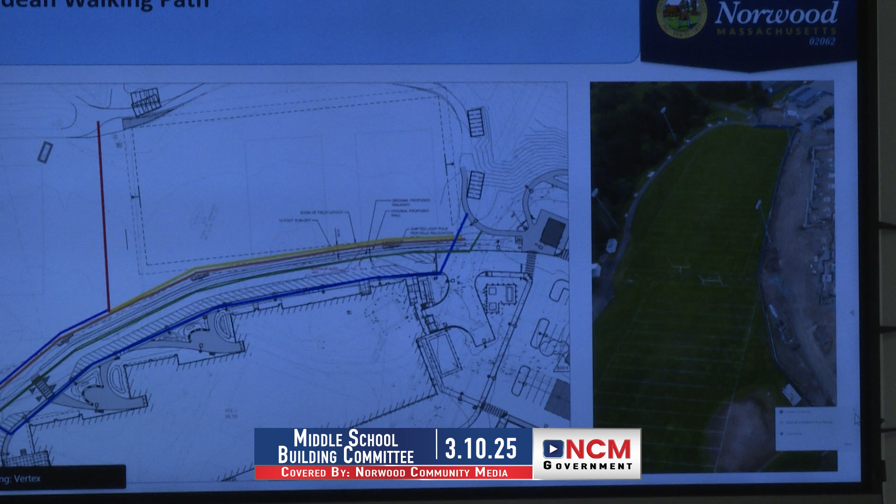So then we took a step back and looked at a couple other options where we would cut through the two fields, which would be that red line, and then a combination of the purple line heading behind the softball field, and then again the yellow line heading between the football fields. Both of those resulted in some conflicts with the softball field. You can't get behind the bleachers, you can see in the bottom right-hand corner there, and the toe of the slope, as well as the backstop. That's an even tighter pinch point there. And then the yellow line resulted in the issues with the football field.

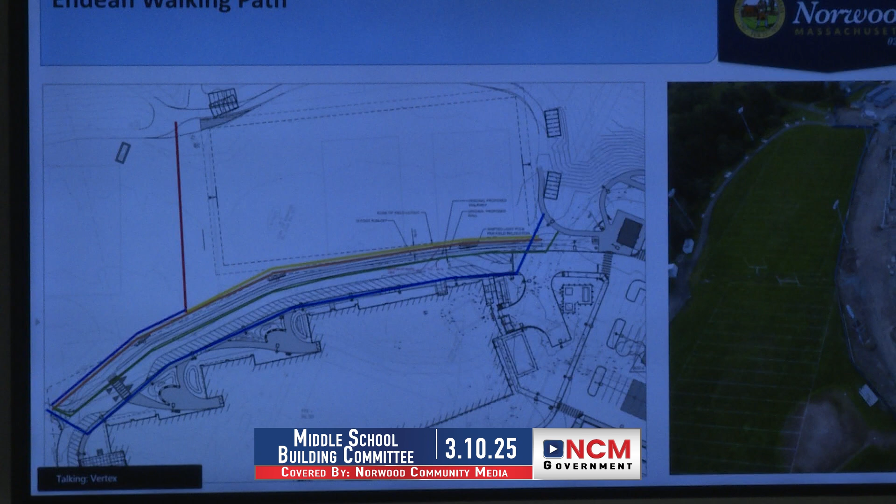So then we took a step back and looked at extending the walking path up the slope to the new sidewalk that's going to be installed adjacent to the new building as a potential option, which would result in minimal to no cost, potentially an added crosswalk crossing over that road or something like that.

And then the fourth option we've just started to look at would be adding an additional sidewalk on the field side of the road, up at that road level. That would eliminate the need to add a retaining wall to reduce the footprint of that slope. And that has some challenges too.

We need to review the width of that road, make sure that's acceptable to the fire department. And then the program of the school, I believe that's intended to be part of the drop-off loop, so we need to understand if we can fit enough room for cars to get by and what the intent is there. But we are looking at a few options.

I don't think we're ready to rule any of them out yet. I think all are possible. It's just the cost factor that comes into play, with the added retaining wall, and then the additional sidewalk, obviously having the two higher price tags. If we can reroute the path to use the new sidewalk we'll be adding, that would also be minimal to no cost, as with the four options we're looking at this time.

So I know you've had some discussions with Mark Ryan. What were Mark's thoughts? His preferred option is getting the walkway back as close as possible to the original path, which would be down at the field level with a retaining wall. He thought utilizing the new sidewalk against the building, although not the best option, would be his least preferred but acceptable.

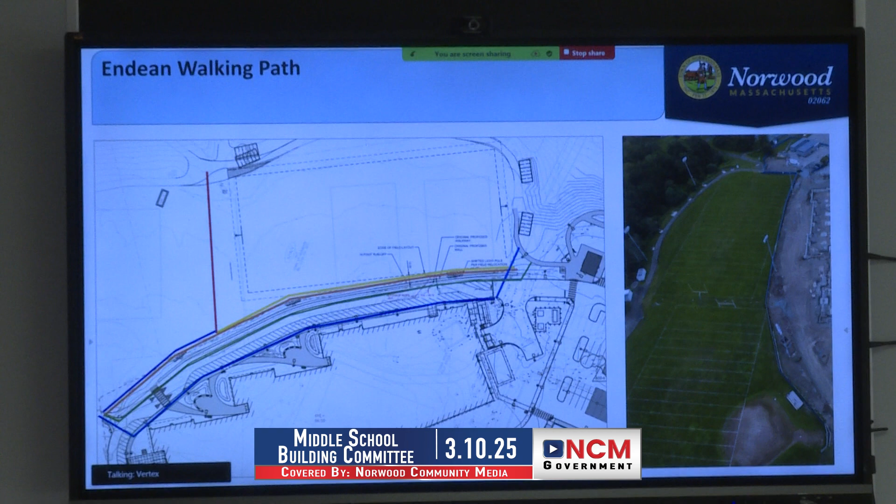Talking through the options, the dark blue line is where you'd come up out of the path, potentially use the crosswalk that's currently supposed to go in at the lower left-hand corner, to get to the sidewalk and walk behind the school. You'd still be able to see onto the field, and then add a crosswalk there to get back to the path near the concession stand. Again, minimal cost - you'd just have to stripe and put a crosswalk in closer to the concession stand.

The discussion point for the committee around the green line is we believe that lane is two vehicle widths wide, so the hashed area is a potential queuing lane that allows cars to get around. If that's a programmatic deal breaker, then we cannot narrow that roadway significantly to put in an added sidewalk.

Obviously it'd be the cost of adding the sidewalk, but the rough grade is pretty much there. It's going to shrink that roadway, and correct me if I'm wrong, it's not going to be narrower than a lane of travel, so from a fire department's perspective there shouldn't be any issues getting apparatus around that building.

Correct. It's just whether or not you intended that striped line to be a queuing and parked car area.

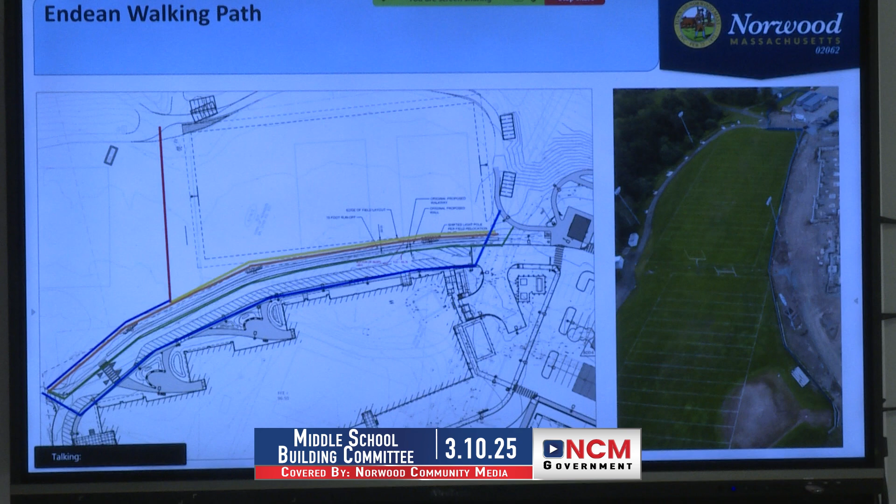For the field locations, we had talked about just doing a stone dust gravel path, as tight as we could along the bottom of that field, which is a basic option. You are going to have a pinch point at the sideline of the football field to that light pole - it's going to be really tight, only 4 to 8 feet.

I would expect, if those fields are in use, a lot of people are going to be standing on the sideline watching their kids play. Potentially standing on that side, correct. I think a lot of people stand on this side for those games, and you also be able to stand up on the bleachers - the bleachers are on this side, correct, yep.

So the retaining wall options, depending on how formal you want the path to be - the retaining wall either goes a majority of that slope to push the path back from the field, or it is a portion of that run of slope around the light poles so the path can go behind them. When it gets to the light poles, you're basically weaving around it.

There is cost associated with any retaining wall option, obviously, and there is cost associated with a new sidewalk up on the road level on the field side. So it really comes down to price point and whether you want to entertain the cost to complete the path.

I assume you're talking to the fire department on the issues of roadway width? I don't think we foresee an issue with the road width if it's a single lane. It just becomes a question of if they have cars queuing there for pickup and drop off, what is that procedure? I don't know how that differs from existing conditions now in certain locations. Obviously if there's an emergency, the cars would have to leave the queue lane anyway, so it becomes - is there a compromise there?

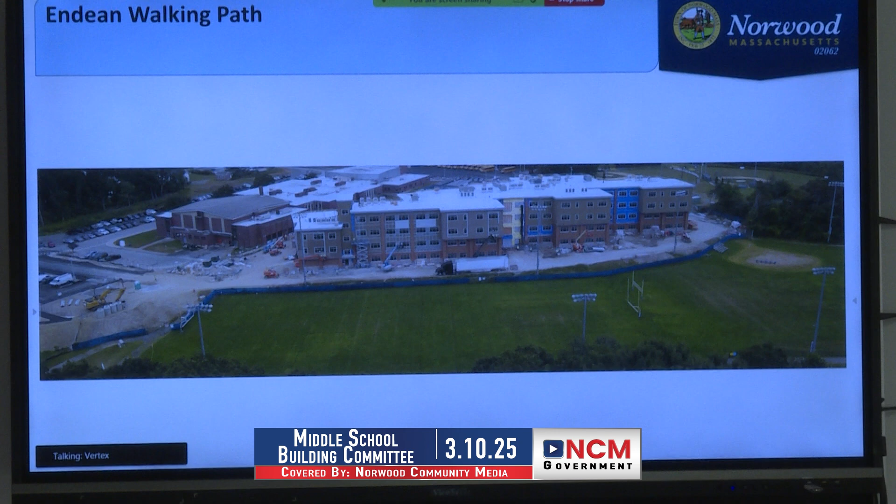All right, any questions, Sherry? Well, I do feel better about the fact that it's still on the table and being discussed.

As I mentioned before, probably a quarter of the people up at that field on any given day, at any function, aren't involved with the games going on. They're watching, or parents are walking the younger ones around to keep them busy. So we're trying to address that issue. We held back on some things in our long-range plan, like a playground and completing the exercise equipment, because we knew this was coming down the pipe somewhere down the line. So we held off, but I feel better about that.

I do have another question. I think I might have the answer, but the last hurrah committee has been approached about when they're going to close this school. They've asked us to look at the potential of putting on a last hurrah up at the middle school. It took us 18 months to do the one for the high school, so if this is a short-term thing, I don't know what we'll be able to do, but it's going to be nothing to the degree it was up there.

We hadn't thought there was going to be any kind of event similar to the high school's, and neither had we until a couple days ago. To be honest, we hadn't planned for it. We talked about it a long time ago, and then somebody approached us asking if we could do this. So we're meeting Wednesday and we'll throw out the idea, but it would be a smaller version. The last one was great, though.

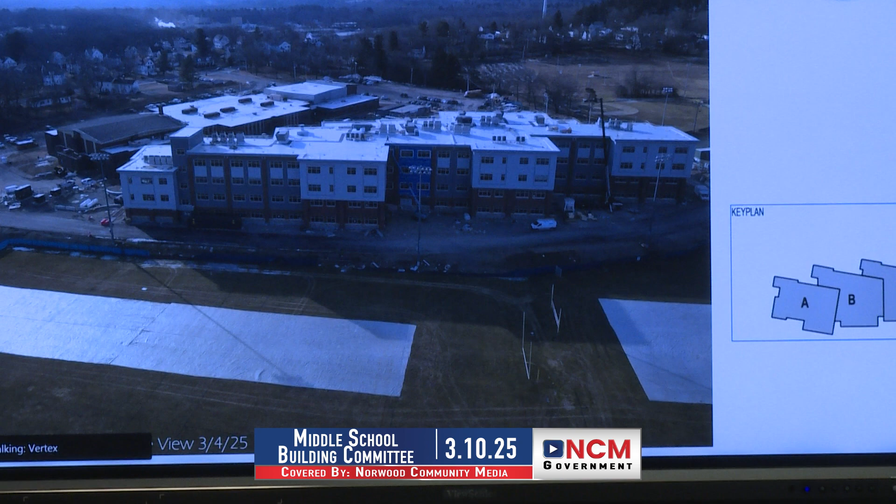Okay, good. And some progress update, some photos, just to get back to our aerial shots. This is the north elevation. We can see the facade is 98% done here. You can see behind that middle athletic light pole a little bit of the blue AVB remaining. That's the only section of facade that needs to be installed, where the loading bays were for the duration of the project to load and unload larger materials. So the windows were installed there the last couple weeks, and the facade in that area is picking up.

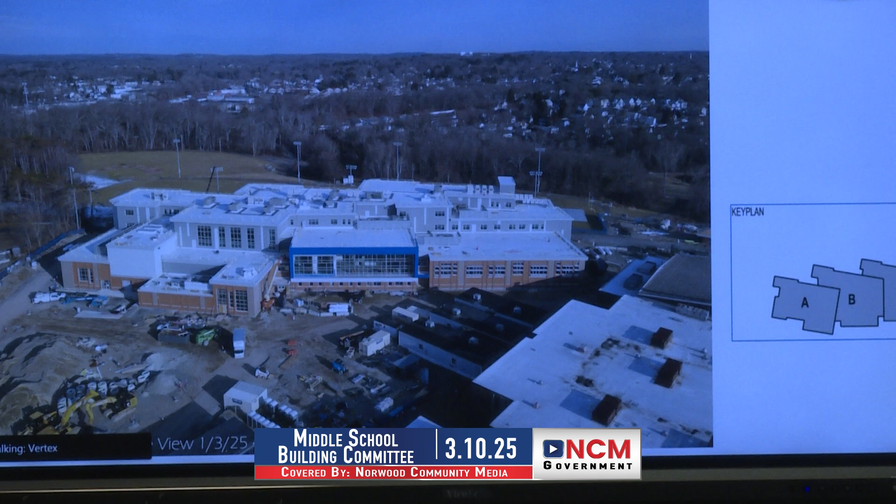Some key milestones achieved on site: second floor classroom flooring and corridor flooring has been completed. Wood flooring is done in the gym, the auditorium paneling as we mentioned. And above-ceiling inspections were received through the building department for the fourth, third, and second floors - a major milestone in order to complete those rooms. They're starting to work on the fourth floor down, closing the ceilings with the ceiling tiles, and then we'll be doing punch lists, some touch-up painting, locking those doors, and walking away until staff arrives in August.

Mechanical inspections also occurred at the RTUs, the rooftop units. Those are important in order to get the balancing process going, which WT Rich has started at some of the high ceiling spaces, like the auditorium, the gym, the student commons. That process will continue in the more typical spaces beginning at the end of March. And the kitchen equipment for the first floor has arrived on site, and the setup and installation of that is ongoing.

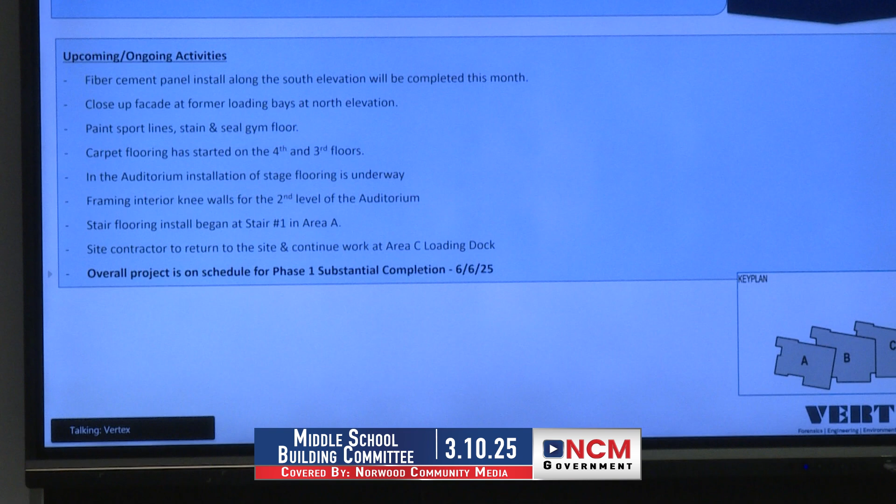Okay, thank you. Just a kind of high-level schedule update. This is just some of the major milestones we're tracking, and some of the major items we're tracking for the next cycle, which will be March.

Allcom is on site assisting in the DAS, the Distributed Antenna System, as part of the fire department's system, tied to the change to the regional dispatch. That is a town vendor installing that work. The main MDF room is complete, or will be complete at the end of March. We met with the town's vendor last week, who will be installing the switches, to get their assessment of the room and what they need in order to begin their installation.

We have a nice checklist from them, and we are completing that in order to get them on site at the end of March, in order to get the building live and start to be able to communicate with all the other systems.

And then as we head down closer to the summer, we target some furniture delivery in early May 12th, which will get us to a substantial completion June 6th, where we're working through, which will be an occupancy with conditions.

This will allow the town access to specific spaces in the building, likely the admin area for the principal and their staff to work in over the summer, and some of the large spaces like the gym. They need to complete some sidewalks and roadways outside of that space over the summer, so those will not be part of that occupancy, and then we'll follow up later in August ahead of students returning in September.

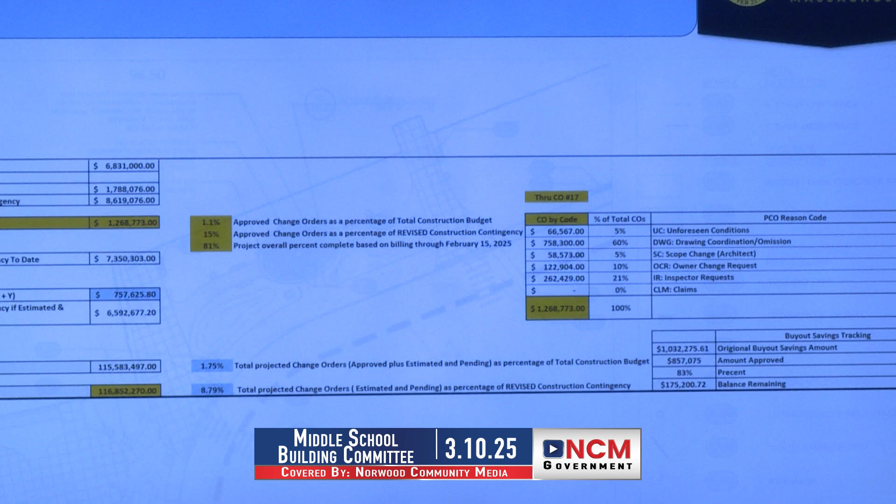And to the outdoor classroom space, play space, this came up, I believe, right before the last building committee meeting, and we were asked to present the design on this space.

So the design right now is to install a concrete patio out there, no seating, no fencing, nothing like that. It would just transition into the grass, green spaces around that. I know there's been some discussion about potentially adding some seating, some benches back to this space, but this is what we have in the design and in the contract at this time.

Any questions or thoughts? So there's no benches, like if parents went with little kids for them?

I think originally there were conversations about more benches and whatnot. I think the committee wanted to have a conversation about possibly putting some of those back if there was funding left over. And I think the intent too was to bring some of the ones that are currently at the middle school over, but we can easily look at adding new ones or different ones, whatever you like.

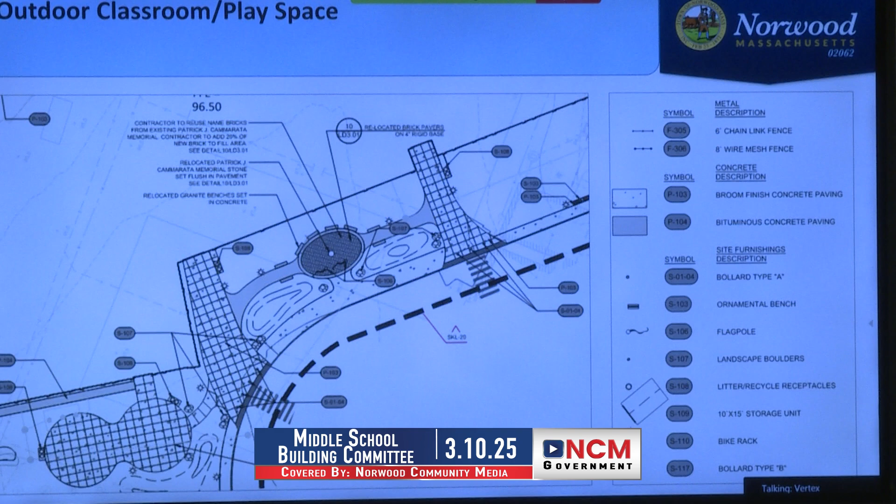So that concrete is between the exterior door of the student commons. You come out onto the concrete, and if you went to the right, you'd hit the loading dock, but in front of all that is the green space. So where there was grass, is there still grass, like in the renderings or the pictures? Yep, that's all grass as you see it.

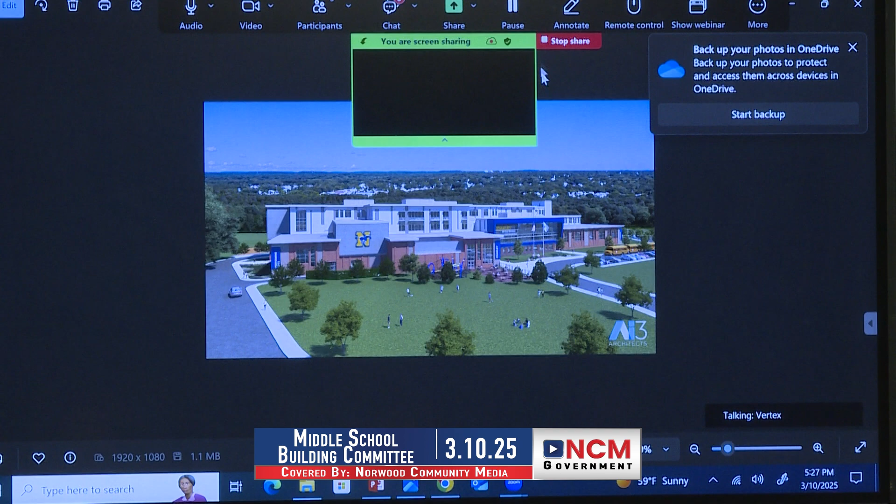Where it shows the playground here, is that the rendering you were just at? I think that's where this peanut-shaped situation is, where the patio was in the first one. Yeah, right there—this was the original concept, it was just square in shape. And the new concept kind of creates the figure eight between the patio and where the playground was.

So what we had talked about was, we had removed the playground, value engineered that out, and then talked about either putting a half basketball court in there or some kind of ball game—like, come on, elementary, what's it called, Gaga ball pit? Something along those lines as opposed to an actual playground. I think that's what we talked about, Teresa, in that area over there.

So the area on this image where the tables are, is that what you were just showing on the other black and white markup? Yes. And then where the playground is right now, there's nothing there? I'm pretty sure it's all open, right? Just grass.

So do we have it in the budget to talk about what goes in that space instead of the playground? Like Margot was just saying, some type of basketball hoop or Gaga pit or something sensory based? The short answer is there's money in the budget.

We can definitely look into it. If you have suggestions on what you want to see, we can get pricing on a Gaga pit or a half basketball court, or anything else, bring it here, and you can discuss it and decide if it's something you want to entertain. I would like to see the half basketball court.

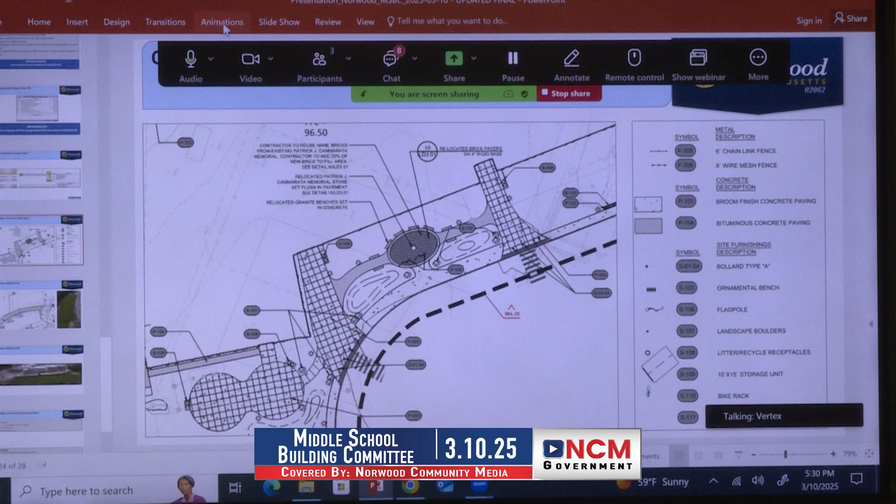Any other items? Just an update on the previously discussed topics, first being the screen wall. At the last meeting, we asked AI3 to put together a proposal for design services for the potential added screen wall. They did put together a proposal for their cost and their consultants. It will be $138,368 if the committee decides to proceed with that work, which would be AI3's cost to design a solution for the mechanical units that would like to be screened.

Do you need a decision today, or can we think about it? Is it necessary to do it today? No, just for consideration. Maybe at the next meeting we can go into this in more detail, what the proposal actually consists of. AI3 could talk us through the proposal if you wanted. It just came out today, so we'll wait until next time for a more detailed discussion, and then we'll move on and make a decision.

On the athletic storage unit, we met with the youth sports group last week and finalized the size and location of the units. We are running through one question with the design team to see if we can shift the location of one unit next to the turf field. Should be a quick exercise, and then we'll move forward with those. The size of those has been released, so no issues there.

And the ribbon cutting ceremony came up at the last meeting. We are talking through that at our transition meeting and will provide updates as that develops, but nothing to add at this time.